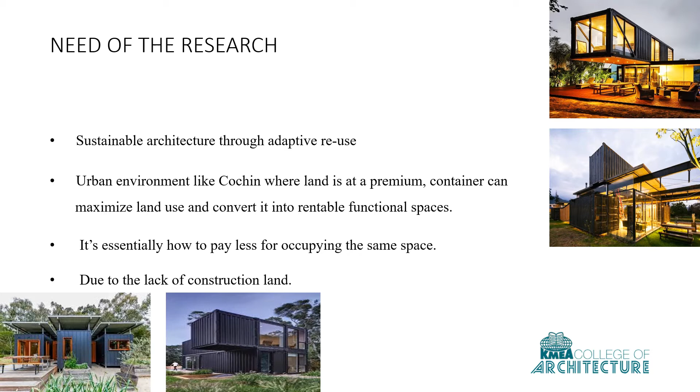Moving on to the research question, the central research question of this dissertation revolves around the effective utilization of shipping containers after their life cycle. When drilled down to their specifics, the sub-research questions are mainly the degree of sustainability of cargotecture, particularly in urban contexts like Cochin, and efficient implementation of cargotecture in terms of suitable building material.

Starting with the aim. This research aims to analyze the practicality of container architecture in Kochi by looking into the pros and cons of this form of architecture, then implementing it effectively, assuring the optimum utilization of resources.

Objectives. To come up with the objectives of the research, a comparative analysis of all the components of architecture in terms of implementation in Kochi, considering the geographic typology, was conducted. The objectives sought to prove the sustainable aspect, its efficiency in terms of time and efforts, and the reusability aspect, of which cargotecture ultimately turned out being well executed in Kochi.

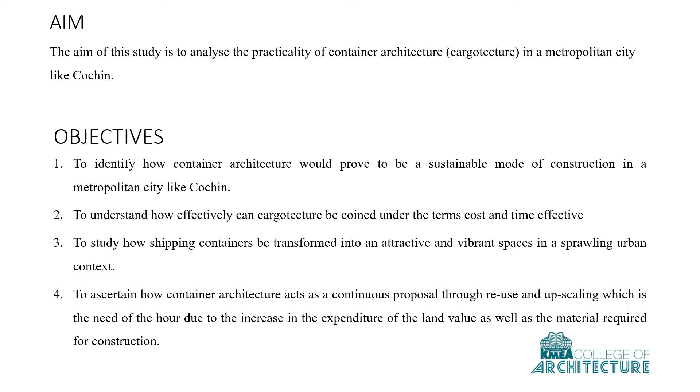Scope. As mentioned earlier, the prime reason why Kochi was selected as a location to implement the study was because of the easy accessibility and availability of shipping containers due to the presence of Cochin port. Moreover, within Cochin itself, implementation of cargotecture in the hospitality industry specifically explains the scope of the research in brief.

Moving on to the limitations, the first limitation could be the fact that the study is subjected to cargotecture in the hospitality industry alone, wherein the scope is specified and restricted to one particular sector. The second main limitation was the limited availability of information through live case studies due to the current global pandemic, COVID-19.

Literature review outline. To brief up on the literature review in this study, the main topics covered comprise the magnitude and history of cargotecture. The literature review basically looks into the primary and secondary published articles and data listing the various advantages and disadvantages of cargotecture, thereby providing a clear insight on progressing with this study.

Furthermore, in the literature review, not only the architects who supported this were studied, but also the architects who found this not an appealing idea were looked into. With the help of certain articles, the cons were outweighed by the pros.

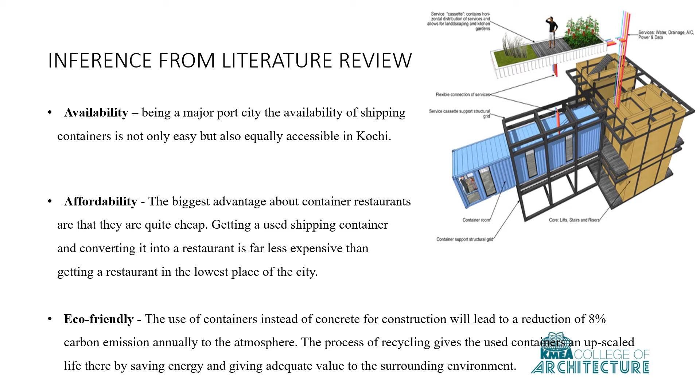Cargotecture proves to be cost and time effective when compared to the local construction techniques. Adaptability also makes the design flexible.

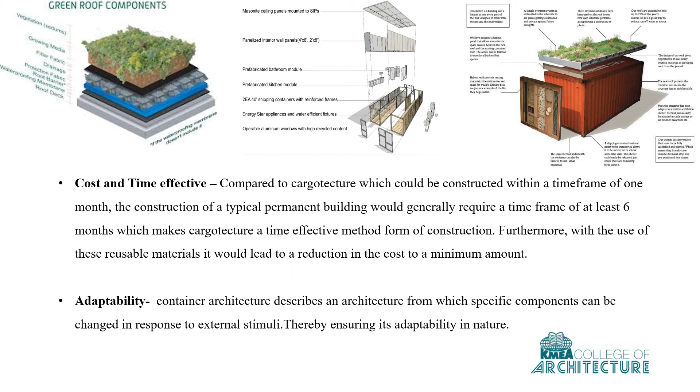Identified knowledge gap. In all the articles and theses that are published, there are a few factors that aren't addressed or left unanswered, which have been answered through my dissertation. First point being its adaptive capacity.

Cargotecture's main disadvantage is its rigid structure, due to which it is assumed that there is a limited number of people it can accommodate. Here lies the catch. That is in terms of the residential sector, whereas in the hospitality sector, with a moving population, the adaptive capacity should not be a concern.

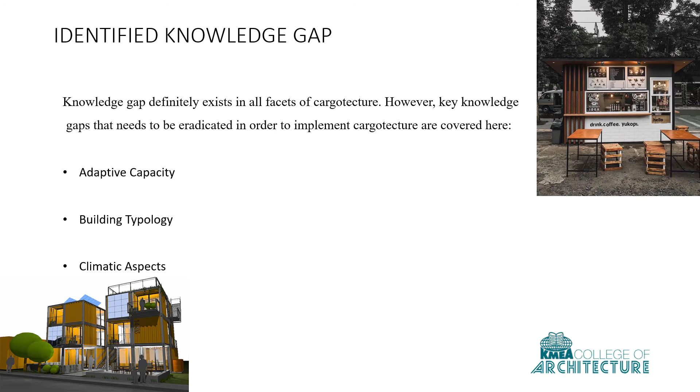Building typology. The other unanswered questions were in terms of building typology and climatic aspects. Every article published on these studies was confined to those particular demographic and geographic typologies.

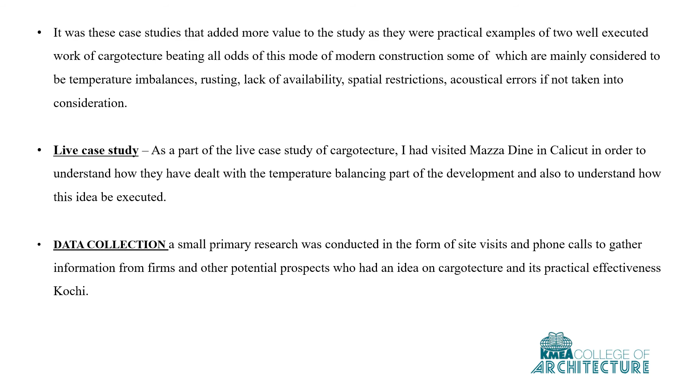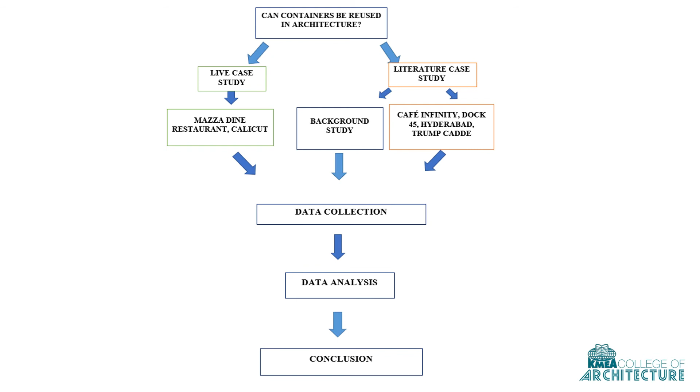Methodology. This research has a mixed type of methodology which is data-centric and rich in terms of quality and quantity. The main sources from where the data was collected include literature review, live case study, and also primary data collection in the form of phone calls to gather information. The following is the flowchart explaining the course of action adopted, right from the data collection till the conclusion.

Results. From all the data collected and analyzed above, a comparative study was conducted in order to come up with these results. So each of these initially listed disadvantages of cargotecture was spotted and corrective measures were given to clear up the hindrances. A gist of which being spatial utilization, where the term rigidity was struck off by ensuring to add more flexibility to the spaces.

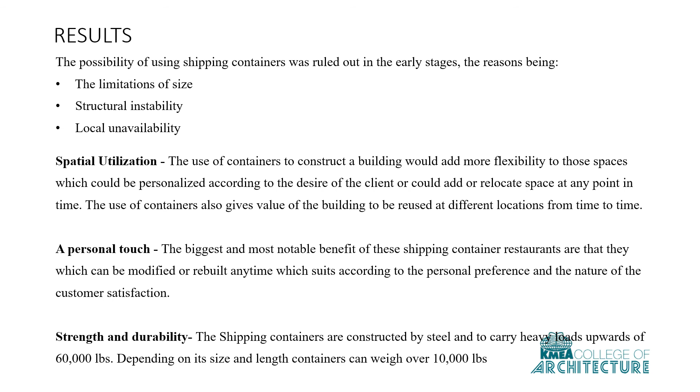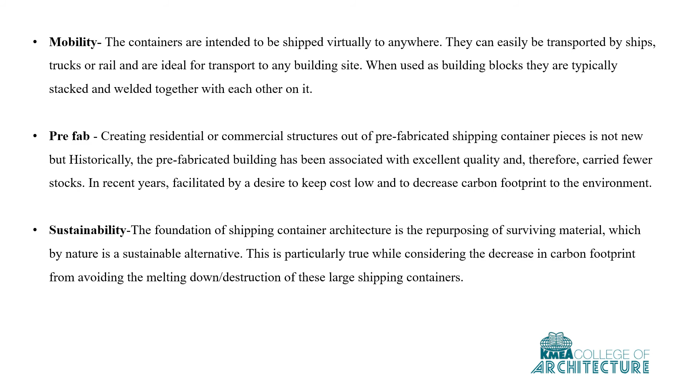Concern regarding their strength and durability is struck off with the fact that these containers are made to carry heavy loads. Mobility and sustainability have always been the most positive and adaptive factors of a container considering their nature. Prefab and personal touch would depend on the inner instincts of an individual. It would differ from person to person.

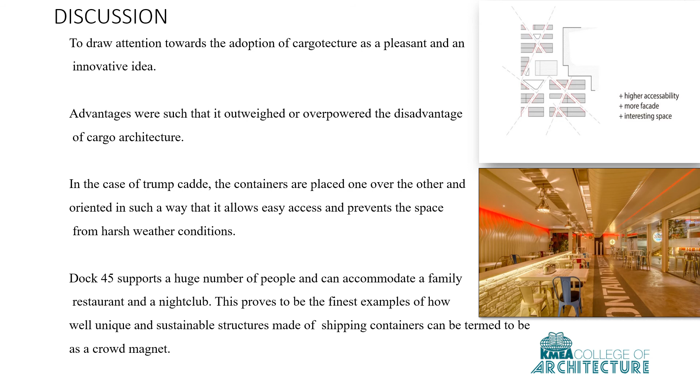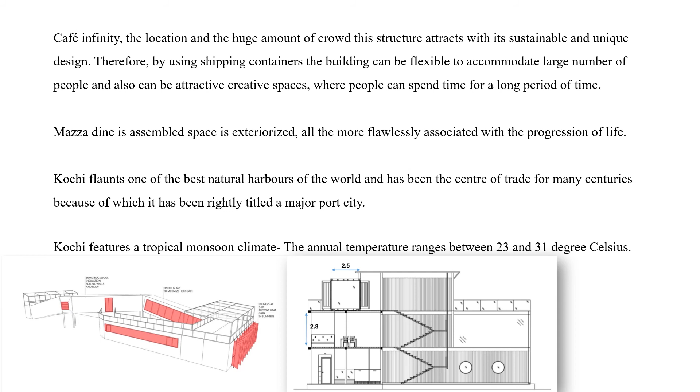Discussion. The advantages were such that they outweighed and overpowered the disadvantages of cargo architecture. To prove that, certain case studies were taken into account and studied, such as Trump Cadde in Istanbul, Dock 45 in Hyderabad, and Cafe Infinity in Noida. Apart from these case studies, I had also conducted a live case study, namely Mazza Dine Restaurant in Calicut, from where the primary data of this research were collected.

Conclusion. To conclude the dissertation, reverting to the main research question, which is: how sustainable is container architecture in an urban context like Cochin? In tackling this question, the report looked into various aspects of shipping containers, right from their manufacturing stage to their structuring, and also all possible pros and cons of shipping containers when converted into eateries or restaurants, especially in a metropolitan city like Cochin.

Cochin flaunts one of the best natural harbors in the world and has been the center of trade for many centuries, and it has been rightly titled a major port city. Kochi features a tropical monsoon climate. Its proximity to the equator along with its coastal location results in seasonal temperature variation with a moderate to high level of humidity. The annual temperature ranges between 23 to 31 degrees Celsius.

Pertaining to the geographical and climatic conditions in Kochi, the central focal point and the concern regarding the adoption of container architecture would mainly be in terms of temperature and rusting tolerance and also means of insulation.